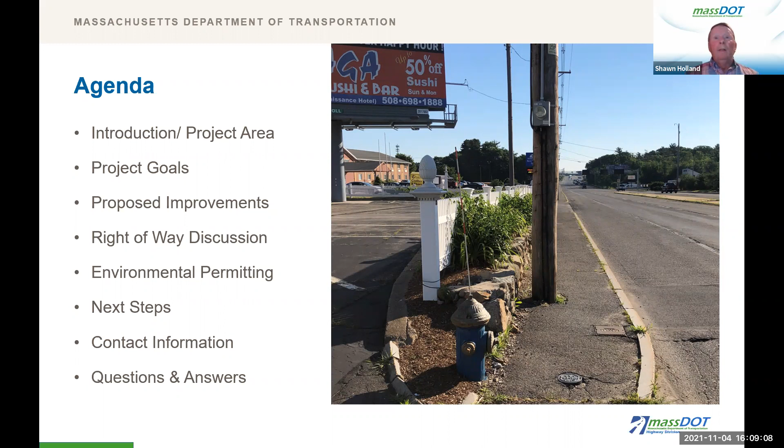Let's see the next slide, please. Again, here's the project team presenting tonight. Myself, I'm the project manager for MassDOT. We have Mike McNutt, a MassDOT employee producing tonight's public hearing. We have Derrick Roma, from our state right-of-way section. We also have the design consultant who works with MassDOT assisting with this design: Denise Kardosz, Valerie Lenhardt, and Tracie Lenhardt.

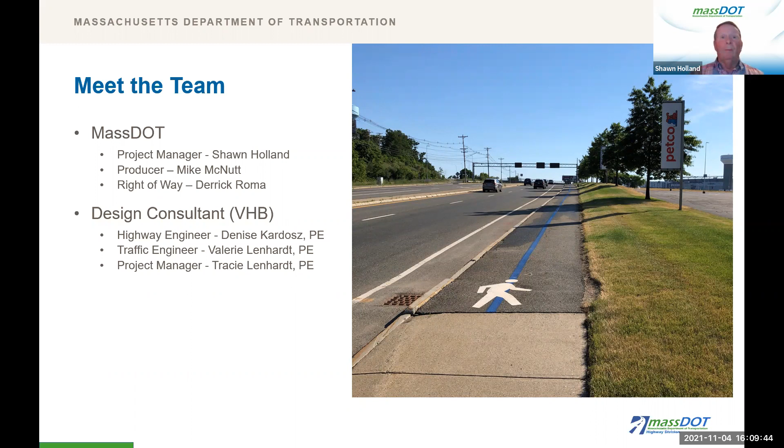Just a little bit about the public outreach for this project. Notice of this public hearing was requested for publication in two newspapers: the Foxboro Reporter on October 28th and November 4th, and the Sun Chronicle on October 21st and 28th. We've also prepared a public hearing notice, a flyer, and a project handout, and posted those to the MassDOT website and calendar events. We've also sent copies to the town of Foxboro, who posted on their town website, and sent the hearing flyer and project handout to local, regional, state, and federal contacts we normally notify of public hearings.

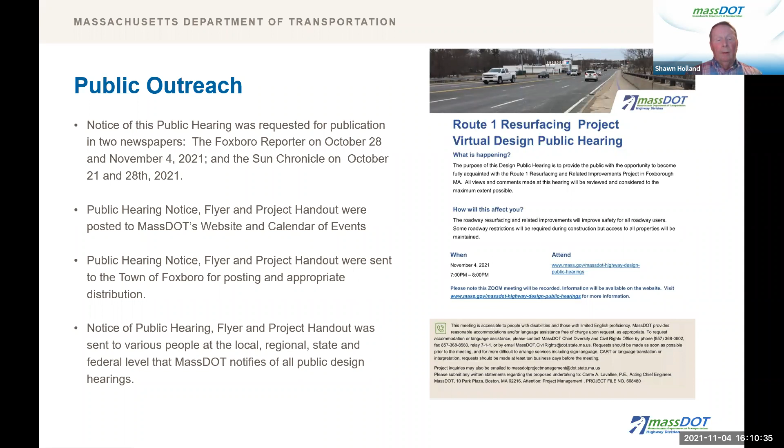I'll tell a little bit about the project limits. The project begins at the Wrentham Town Line and continues north approximately 2.8 miles to the Walpole Town Line. Within these project limits there are 8 intersections shown in orange with round circles. The ones marked with a little S are signalized intersections with traffic signals.

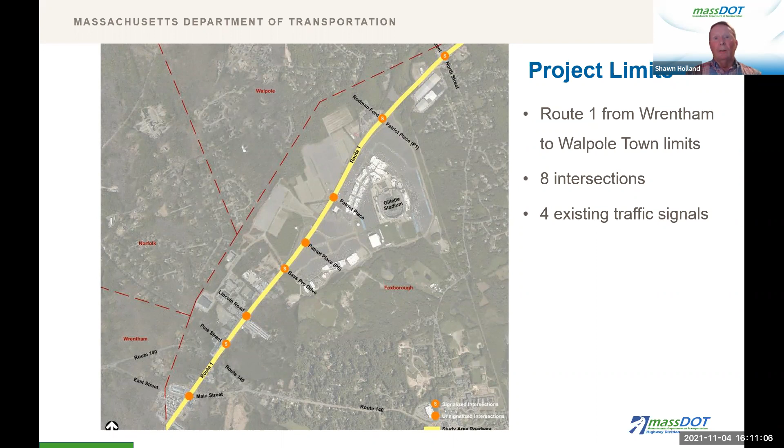So why was this project initiated? The Route 1 resurfacing project came about because several sections of Route 1 within the Foxboro town limits have pavement conditions identified as poor to fair. As such, MassDOT decided to add this to our statewide preservation program. The project goal at the beginning was to improve the pavement conditions of Route 1, as the pavement is in pretty tough shape. The secondary goal, as we were out doing the pavement design, was to address any roadway deficiencies we could incorporate into this resurfacing project.

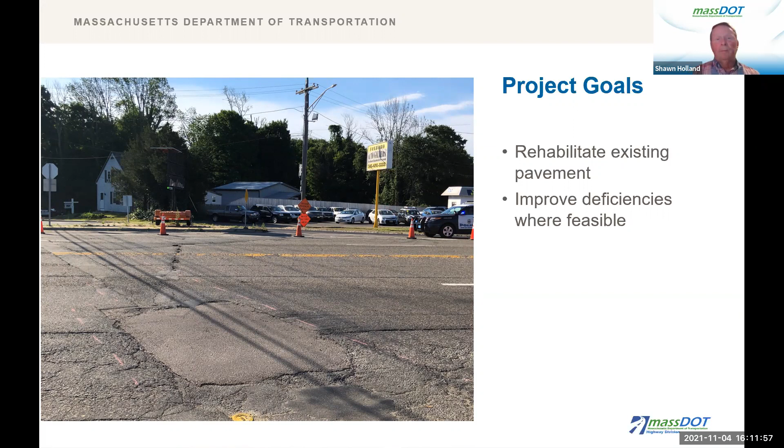How did we get here? The project was originally initiated in 2017 due to the fair and poor conditions of the roadway pavement, which deteriorated a bit as the years went by. We initiated a design contract with VHB to help prepare the design plans. VHB went out and did a roadway safety audit, came up with various conceptual designs, submitted a pre-25% design, and finally a 25% design. We've been going through that 25% design for a while, with some internal discussions about changing design elements, and now we finally have a 25% design plan we want to present to you tonight and get any comments you may have.

What we want to accomplish: this project primarily started as a roadway resurfacing project to address deficient roadway conditions, with a secondary goal of addressing identified deficiencies. The specific proposed improvements include mill and overlay resurfacing on Route 1, traffic signal improvements, pedestrian facility improvements, replacement of old guardrail that doesn't meet current design standards, and minor drainage improvements.

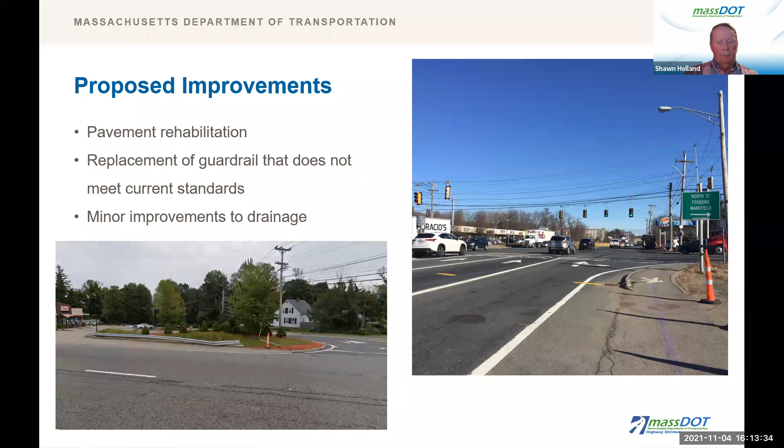At this point, I'd like to hand our presentation over to Valerie from VHB, and she'll present a detailed presentation of the project and get into more detail about the project improvements.

Thank you, Shawn. Part of the project includes upgrades to the traffic signals along the corridor. Some of these improvements include installation of a signalized mid-block pedestrian crossing just south of the Main Street/East Street intersection, replacing existing pedestrian signal heads with countdown units, updating pedestrian push buttons to meet ADA compliance, modifying the existing video detection zones to provide for bike detection in the shoulders, and reestablishing coordination along the corridor to improve traffic flow.

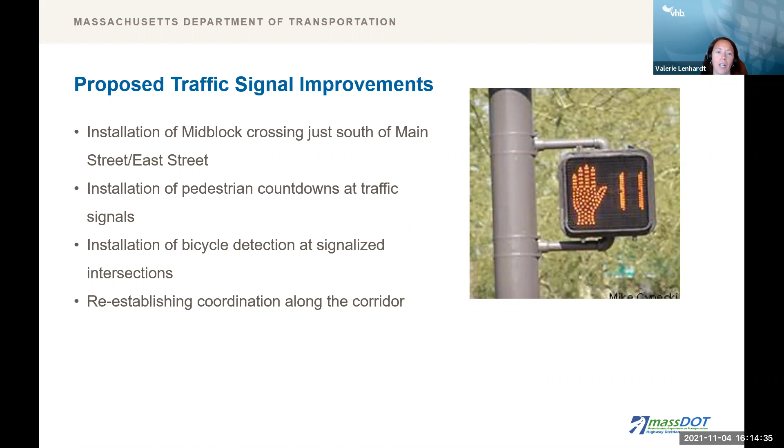Now Denise will inform you about the pedestrian improvements of the project. One proposed improvement is providing sidewalk on the east side of Route 1 at the southern end of the project at the State Police Barracks, through the Main and East Street intersection to the Dunkin' Donuts property. In addition, non-ADA compliant pedestrian curb ramps will be reconstructed, and sidewalks that are non-compliant or in poor condition will also be reconstructed.

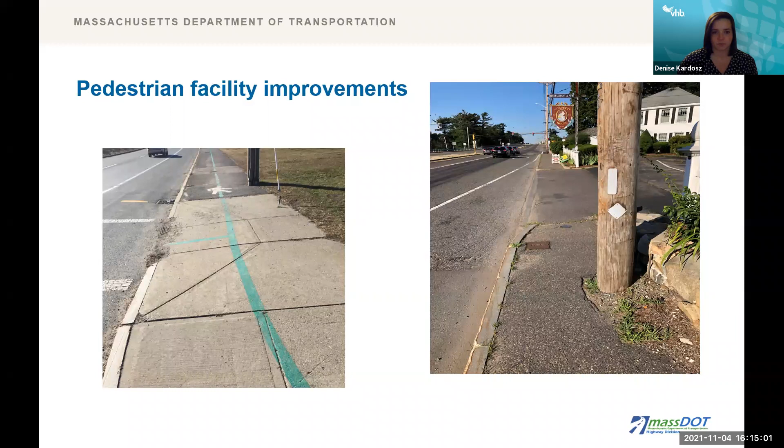Improvements to the Main and East Street intersection include installing a high-intensity activated crosswalk, a pedestrian beacon, and pedestrian curb ramps for a new crossing at the intersection, which Val will talk about later. On the east side of Route 1, a new sidewalk will be constructed starting at the State Police Barracks and continuing approximately a quarter mile north, ending just past the Dunkin' Donuts property.

How does a hawk signal work? Typically, a hawk signal is dark for vehicles and shows a raised hand for pedestrians. When the pedestrian activates the signal by hitting the push button, as long as it hasn't just been previously activated, the signal will immediately respond, starting to flash yellow.

The signal flashes yellow to drivers for a few seconds to warn them it has been activated. Next, it goes to a steady or solid yellow for a few seconds to warn drivers they're about to be stopped. Then the signal goes steady or solid red while the pedestrian signal head displays the walk indication.

After the walk phase, the signal goes into a flashing or wigwag red while the pedestrian sees the flashing don't walk hand in the countdown display. Lastly, the signal goes back to being dark. The next slide will show an animation of just what I verbally said.

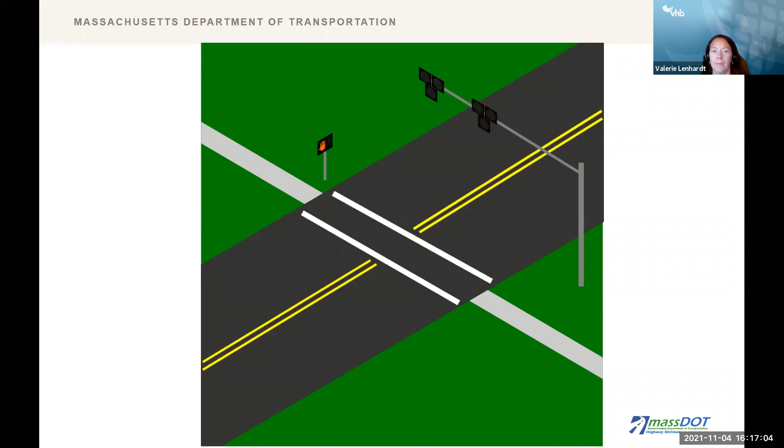This is a picture of a similar MassDOT project. This roadway is also a 4-lane cross section.

Now back to Denise. Proposed improvements to the North Street intersection are to provide crossings across all 4 legs of the intersection, as well as ADA compliant pedestrian curb ramps and minor modifications to the pedestrian traffic signals for the new crossings.

Good evening, my name is Derrick Roma, and I'm here representing the Right-of-Way Bureau at MassDOT. The Right-of-Way Bureau is responsible for acquiring all necessary rights in private and public land for the design, construction, and implementation of this project. Affected property owners will be contacted by personnel from the Right-of-Way Bureau and/or consultants representing MassDOT. The procedures used must comply with state and federal regulations governing the acquisition process.

The current design plan indicates that fee takings and permanent easements may be required, and other areas may also require temporary construction easements. Affected property owners' rights are protected under Massachusetts General Laws, primarily Chapter 79. And if a project is receiving federal funds, then the property owner's rights are further defined under Title III of the Real Property Acts of 1970, as amended.

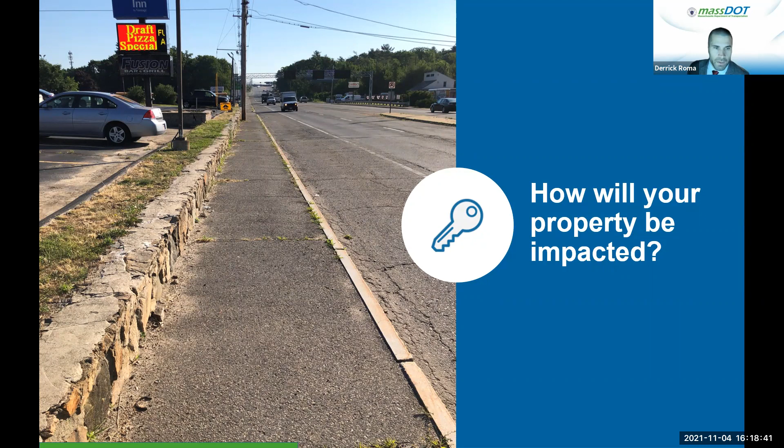What are the environmental, cultural, resource, and community impacts? This project is mainly focused on a roadway preservation project, but due to the minor drainage alterations at the headwalls, environmental permitting will be required. From the permitting perspective, this project will comply with the Massachusetts Environmental Policy Act, the National Environmental Policy Act, Section 106 for historic and cultural resources, and outstanding resource water considerations to repair existing headwalls.

Therefore, the project will require submitting an individual Section 401 water quality certification to the Massachusetts Department of Environmental Protection. In addition to these policies, a notice of intent application will be submitted to the Foxborough Conservation Commission at a later date.

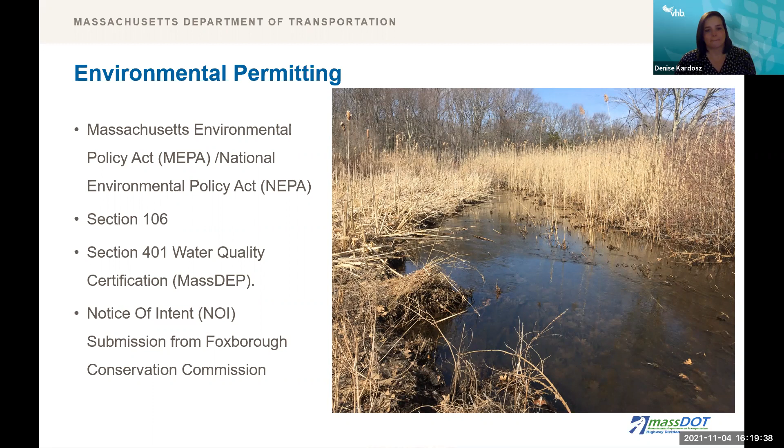What is the construction approach? Construction is expected to start in the spring of 2023 and last approximately 12 months. During construction, pedestrian, bicycle, and motor vehicle access will be maintained.

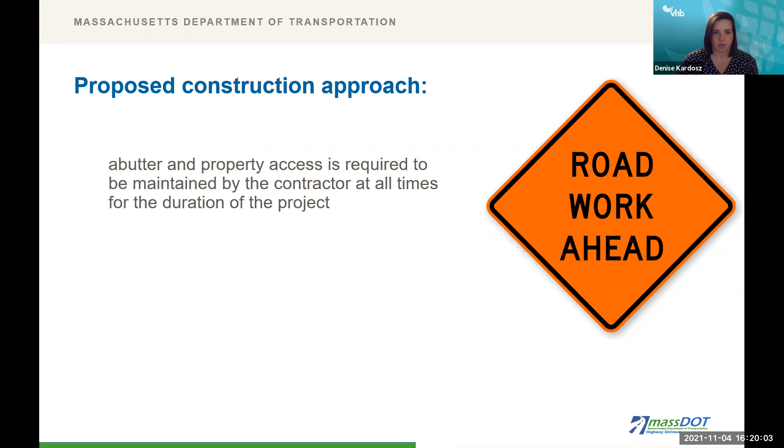A minimum of 1 lane in each direction will be maintained during peak hours. If implemented, roadway closures and detours will be limited to short durations, and night work will be considered for limited construction activities.

Thank you, Valerie. Thank you, Denise. The next steps: right now, as we've mentioned, we're at the 25% design stage. What we want to do tonight is present the plans to you and explain them. We'd like to hear any comments, ideas, or suggestions you may have that possibly we can incorporate into the 25% design if appropriate and feasible.

After tonight's public hearing and any comments received, we'll proceed to 75% design, 100% design, and final PS&E. We'll also need to secure the right-of-way and any environmental permits. Finally, we'll get to project advertisement and construction in 2023 and 2024.

How we would keep you informed: at any time during the design process, from now up into construction, MassDOT welcomes any public comments, ideas, or suggestions you may have. There are several different ways to do that.

You can submit comments by mail to Acting Chief Engineer Carrie Lavallee, or you can send them by email. We have an email address there, MassDOT Project Management. Our preference at this point would be to receive them by email, since mail has been a little tough to handle these days with the closing of a lot of the state offices. So if you could, send in your comments, questions, and inquiries by email, that would be best.

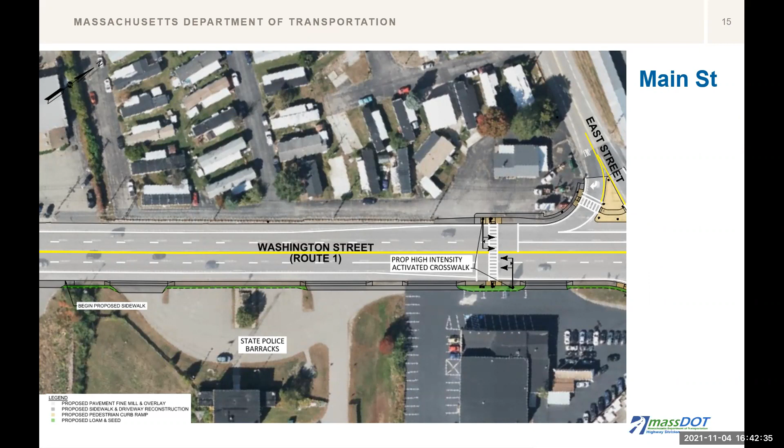Is that where the hawk signal is? We have that slide. So I'm just a little bit further north, just north of Dunkin' Donuts. Oh, okay. I believe that looks like there's a little green strip. I am just a little bit further north, that's my entry.

Yeah, I don't think we have a slide on that. Do we have one? It says proposed loam and seed, I saw pop up as the green area, just behind the proposed sidewalk. Yes. I think your property is sort of just where it says end proposed sidewalk, just north of that? Yes, yep, there's a proposed sidewalk, which I'm very excited about, because my tenants in my office building, I actually built a pathway through the woods to get to Dunkin' Donuts, so I think that will be a valuable thing.

One point of information, I wasn't sure if there's a land taking where that sidewalk is going, because I actually have a billboard sign being installed at the beginning of December. It's located between my building, basically where that beautiful autumn orange tree is right now.

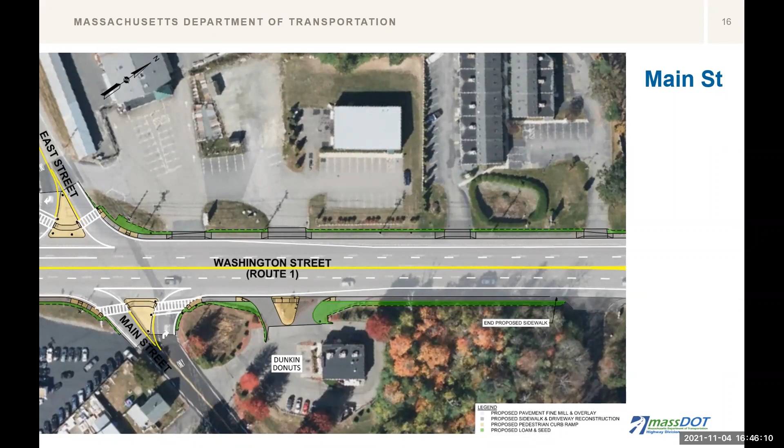And I guess that answered my question, there's no upgrades to that intersection. Correct, I can verify, but it looks like there is a right turn head indication for that southbound movement leaving Pine Street. But right now it's just a green light and you can take a right on red at that intersection.

Okay, I'll have to look into it. Please submit a question, I'll be glad to do that. That was it, those are my two questions. And just to verify that there isn't going to be additional land taking from my property would be helpful as well. Okay, thank you.

It's helpful for us a lot of times to get these questions and comments in writing, so we make sure we know what you're asking, what your concerns are, and then we can get back to you. We appreciate that. Thank you.

I don't see any more hands up. Let me check the Q&A box. No one's typed in any questions. Does anyone have any final questions? Nothing.

Oh, we have a question, Christopher Gallagher. Sure, just will this presentation be posted somewhere that we could also share along with any design plans that we get at this point? Yeah, we'll be doing a recording of tonight's presentation, and within the next day or two I'll get a transcript, so we need to make sure we edit that. It'd be closed captioning.